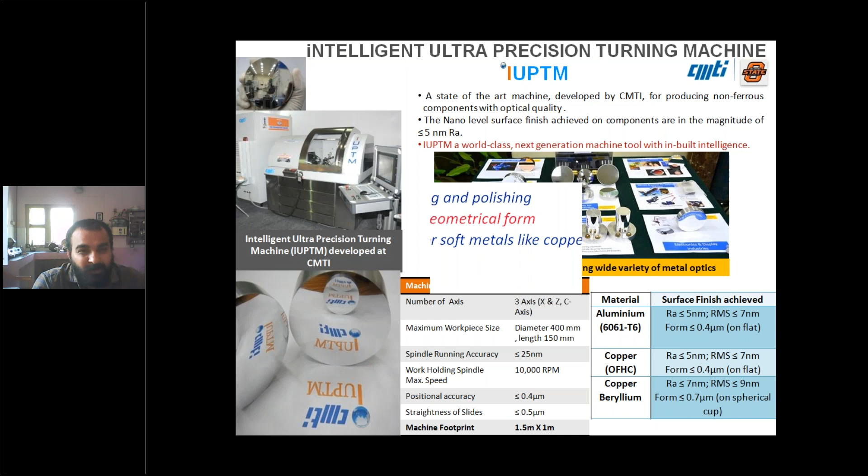Let us go to the applications. Coming to the applications, the reason this machine is very expensive is because the elements we use are all frictionless motion systems. This frictionless motion system provides nanometric motion, and also will not have any thermal deformations. That way you get accuracy in terms of nanometers.

This machine basically can produce metal mirrors, and also mirrors related to brittle as well as ceramic materials. If you look at an infrared camera, the basic heart of the infrared camera is the lens. That lens is made out of silicon and germanium, used for night vision applications.

If you look at our requirement, mobile is a very important device today. How has it become so important? Without mobile we don't move out from the house. Likewise, for a soldier, a night vision camera is very important; otherwise he will become blind and cannot fulfill the purpose he is supposed to. That way we have a huge requirement for night vision cameras.

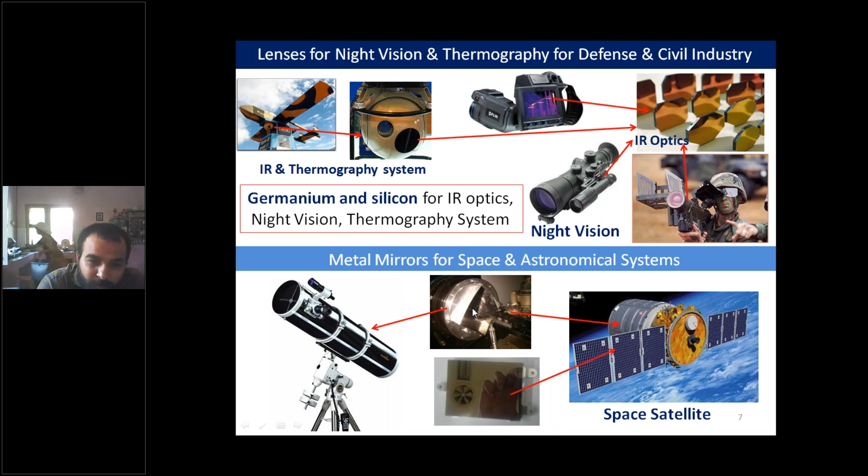Coming to the second application, metal mirrors for astronomical systems - those metal mirrors you can produce using this machine. And then we have ophthalmic applications, almost 70% of the lenses.

India produces about 60 to 70% of the contact lenses across the world. Those molds you can produce in this machine, and in turn you can make contact lenses for just 30 to 40 rupees. Those who had gone for cataract surgery - your parents or other old age people - would have spent 15,000 rupees for the lens, but actually it can be produced within 25 to 40 rupees using this technology. You can also produce ultra precise mechanical components. If you want to develop something like hydrostatic bearings or aerostatic air bearing elements, you can produce them using this machine, as it can produce nanometric accuracies.

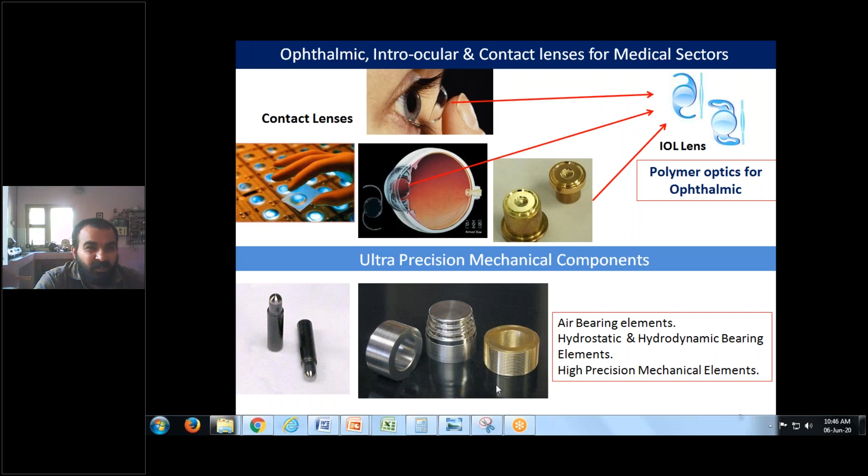If you look at defense and electro-optics applications, you can make head-up displays using this machine. When you go to high-end cars, you can see light reflectors - you can also make molds for those and mass produce them. For photonic applications, you can produce micro lens arrays. And when it comes to display systems, again you can make molds and mass produce.

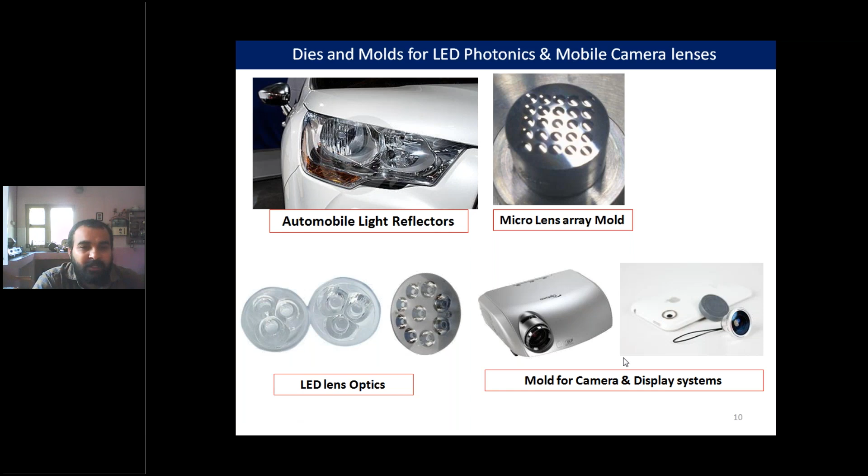Coming to energy applications, you can make Fresnel and diffractive lenses on silicon, which in turn increases the efficiency of solar energy. And coming to metal mirrors, lasers are used in various applications today. To guide the lasers, you need metal mirrors. All these metal mirrors are used for laser micro machining or laser welding and so many sophisticated systems, guiding the lasers.

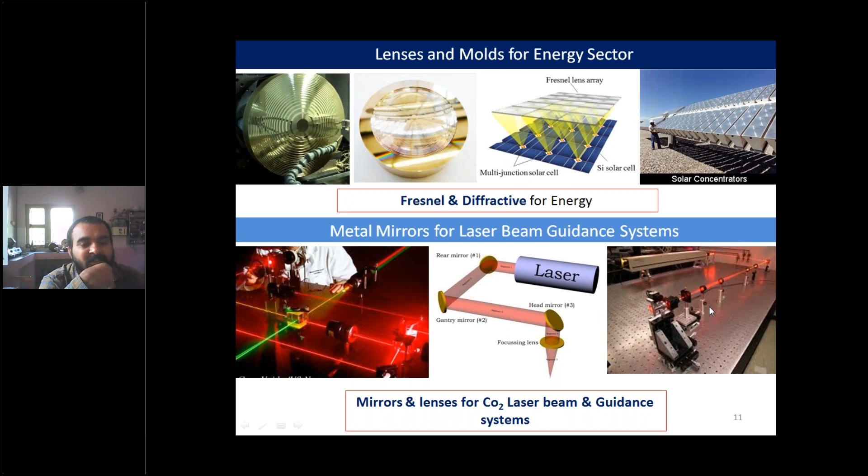Moving forward, that is about applications of ultra precision machine. One module I wanted to talk about, where you need to understand where artificial intelligence will be used in machine tools, and also how computer science and electronics students will be part of developing a single module.

This is a simple software module I have developed, a thermal error compensation for ultra precision machine tools. If you look at any component coming out from the machine, there are two aspects to look at: one is component accuracy, the quality of the component. When you keep producing that component, you will never get repeatability within 5 microns.

Most of the time, in any production environment, they say that whatever values are mentioned on the job will be somewhere close to 5 micron repeatability. This shows there is an error of 5 micrometers on the component you get. But the challenge here is we wanted to control the repeatability within 1 micrometer for a whole day's production.

This component takes 5 minutes to produce. Likewise, in 1 hour, 12 components; in 24 hours we may make close to 300 components. When I make 300 components, the component size should not vary beyond 1 micrometer. That is the challenge. Now how to address it?

The reason we get that 5 micrometer error in any machine is thermal error. There are many errors that occur on the machine—one could be geometrical error, one could be thermal error—but thermal error is the major contributor to component accuracy. About 70% of the component error you get is due to thermal effects.

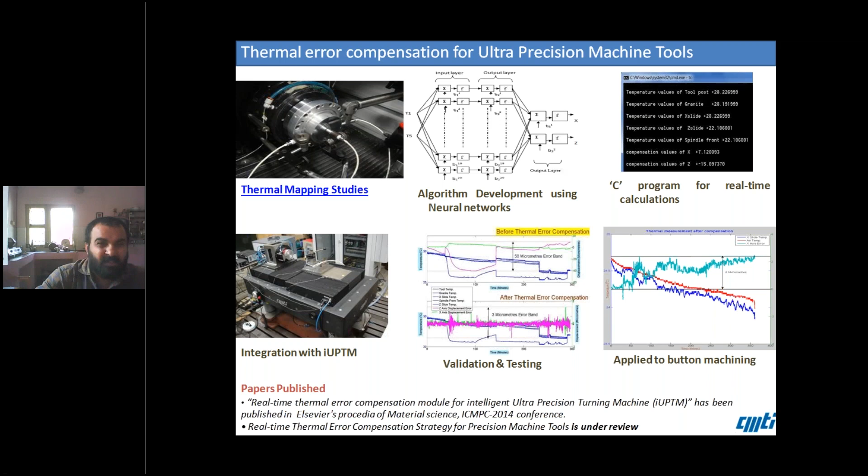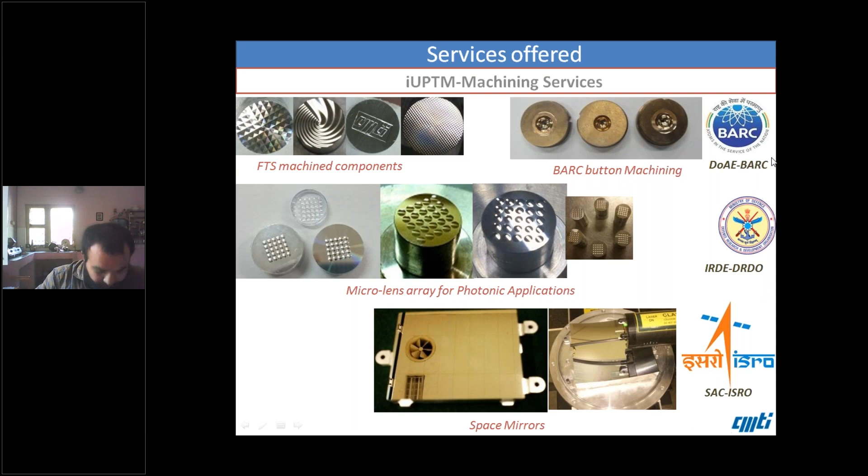And these are the services we do to the industries. Here we have supplied metal mirrors to SAC Ahmedabad. We have supplied some micro lens arrays to DRDO labs. Then we have made some precise components to Department of Atomic Energy. And these are some of the publications what I have done.

Whatever products we develop, we don't keep it in the laboratory. We try to take it to exhibitions and receive either comments or appreciation. We try to exhibit in international exhibitions. Very few organizations will be doing this kind of activity, because showing your product across the world is a challenge for Indian community at least.

This is a high-end microscope where you can do nanoscale imaging that we have developed. And then we developed the aerostatic spindle. This is again first time in the country.

None of the Indian companies could able to develop this kind of precise spindle where the running accuracies will be less than 50 nanometer. If you see a normal turning machine or turning spindle, it will have an error of 5000 nanometer, whereas here you get only 50 nanometer error.

When I make a circle, that is a perfect circle what a human can draw. If I put a pen and make it rotate, I will get a perfect circle. And here this is a hydrostatic slide where it can move in terms of 1 nanometer, and it can take a load of 1000 kg.

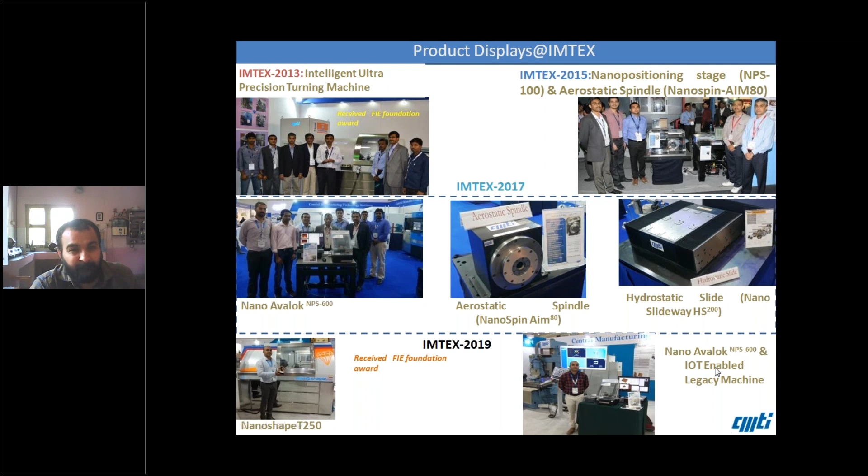With this, my introduction is over about the work what I have done. In summary, what I want to say is, if you want to develop a very good product, you need to have a multidisciplinary team. And in your college also, if you want to make a new product, let people collaborate between departments, and you can make a beautiful product.

And of course, if you see Industry 4.0, it is a combination of mechanical, electronics, communication, and IT. Then you need to have a dashboard developer where computer science students can do that. That way you can make beautiful solutions in the college itself.

And one more beauty about Industry 4.0, it is an easy catching technology. You don't need to have sophisticated equipment, because the internet web is freely available now, sensors are freely available at a cheaper cost, and the electronics whatever you buy from a local market, it will be very few bucks you can get it. You can do very simple solutions like energy monitoring for the college, your department, or your home. You can do many things.

With this my first topic is over. If you have any questions, I would be happy to answer.

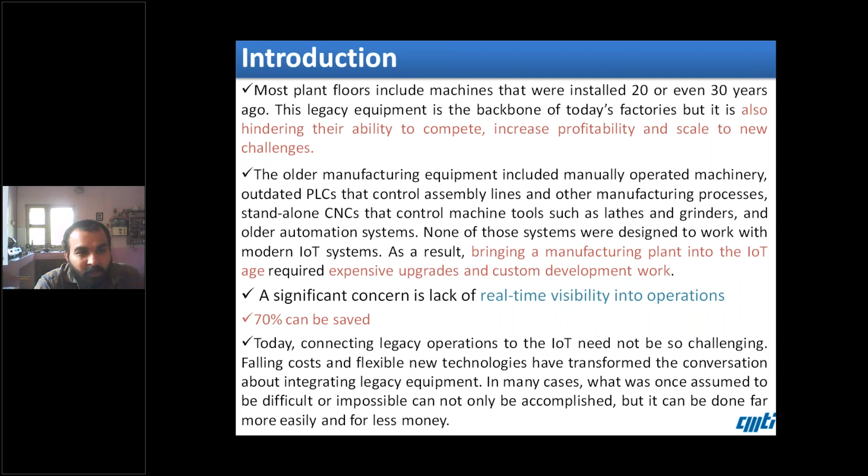That way industries would be very much happy to collaborate with academic institutes or research organizations if we can provide solutions. Now let us see how to convert these old machines into new ones. This is not very tough to do. There are only 4 ways wherein you can convert old machines into IoT smart.

Either you fix external sensors - you buy low cost IoT sensors or normal sensors, and then put it on the machine, and somehow you gather the data.

The second one is, there are some requirements where they wanted huge information from the machine. Then there will be limitation with respect to the old machines. In that case, what you have to do is change only the drive or motor or controller altogether. That way you can get full information about the machine.

If your requirement is that you have hardware and still you want to collect the information using the same hardware, there are some intelligent gateways available. Using these intelligent gateways, you can convert the protocols whatever way you want. There are protocol converters available - those we call intelligent gateways.

And we have video cameras. If your requirement is basically to monitor the production, or you want to measure something, then you can use video cameras and monitor it. This way you can convert old machines into IoT smart.

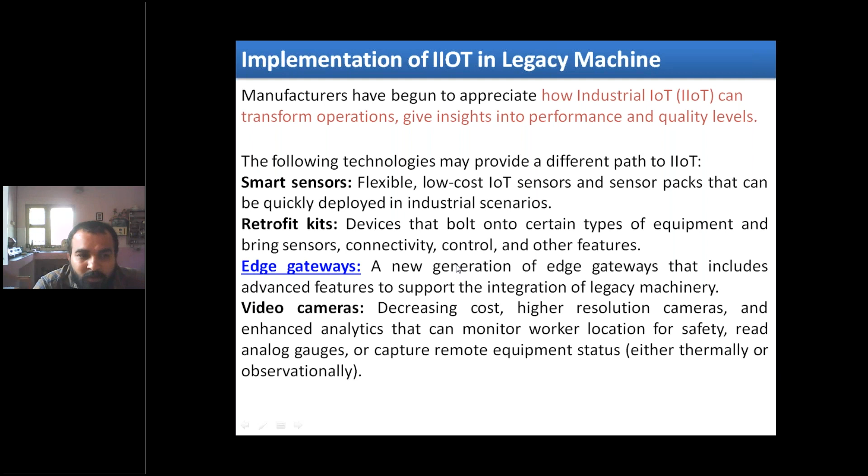One is using external sensors, one is changing hardware - only the electronics part, not the mechanical, because mechanical elements can work for longer duration, something like 30 to 50 years. In some cases you don't want to invest anything, then you just buy some intelligent gateways and push the data to the computer. In other cases, you just want to monitor the production or measure something, then you use video cameras. Most of the applications, these 4 solutions will work, and you can provide the solution to them.

And how can we do this? This is one demonstration I made to show people how to convert. I have taken a very old machine, and there I have mounted temperature sensors, and we connected LEM current sensors, and we connected an accelerometer, and we connected a pressure sensor, and we connected a video camera. The basic objective was to show all the possible solutions in a single module.

Then this you can use for thermal behavior, this you can use for energy monitoring, this you can use for health monitoring of the machine, and pressure you can use for any alarms, like pressure monitoring. And computer vision we have integrated for measuring the component accuracies - whatever part comes out from the machine, whether that part is okay or not, that report is also generated using this computer vision.

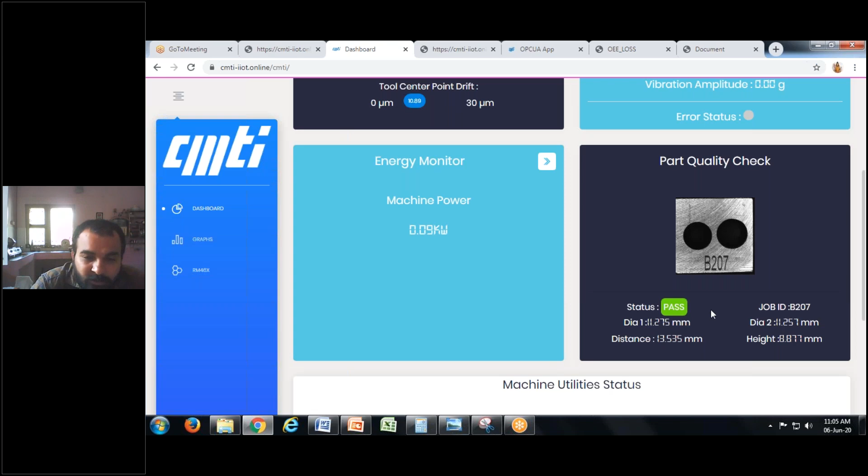As I showed the vision camera, this component will keep moving on the conveyor. It is an automated solution where it measures the diameter of 2 holes and measures the pitch. If within tolerance, we say it passes, otherwise it fails, and it generates a report at the end. This is a small demonstration of how to convert a legacy machine into IoT smart.

Then my second topic is also over. I'll be moving to the third topic, that is the smart manufacturing demonstration and development cell.

This is a government of India initiative. As I mentioned, in India only 2 to 5% of machines are connected. There is a huge scope for everyone to make that 98% of machines connected. That way, each industry will benefit with respect to Industry 4.0, productivity, maintenance, speed to market, and finally flexibility to adapt to new technology and increase the variety of jobs and products they can do.

The government of India has identified 4 centers for Industry 4.0: the first is IISc Bangalore, second is IIT Delhi, third is CMTI Bangalore, and fourth is Kirloskar Pune. Our basic job is to provide awareness to industries on Industry 4.0, and also demonstrate workable demonstrations.

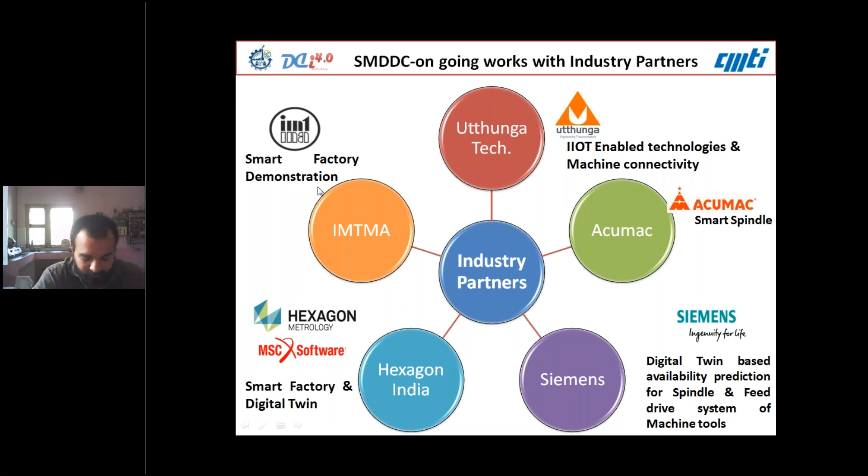Here the truck is bringing the raw material and coming to the loading and unloading station, and using this automated guided vehicle, it goes to the first machine using a robot to the turn mill center, then to the second machine using a robot to the vertical mill center. Then it goes to the grinding machine, then Schaublin, then comes to another machine.

Then it will go to the washing station, like a deburring station, and go for measurement. Once the measurement is done and the component is accepted, it goes back to the unloading station, and the item will be shipped to the supplier.

This is the whole concept I was mentioning. This is the smart factory we are trying to establish at CMTI. You can see here what is very important is data.

Whatever each machine is doing, you can see there is a Wi-Fi symbol. The machine keeps pushing the data, and that data goes to the master controller, one for giving information to the machine, writing programs to the machine, and also understanding what the machine is doing - live performance you can see. We also take real-time information from the machine and give instructions to the maintenance engineers.

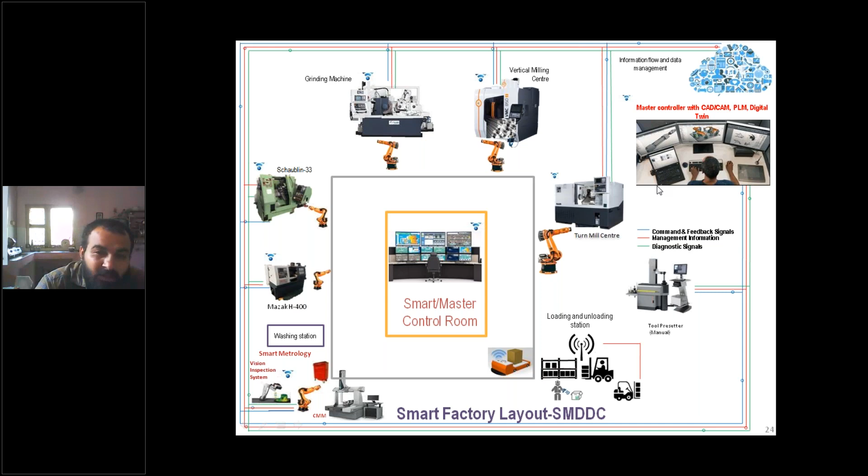to prepare or plan for the maintenance. All that activity, this master controller will be doing.

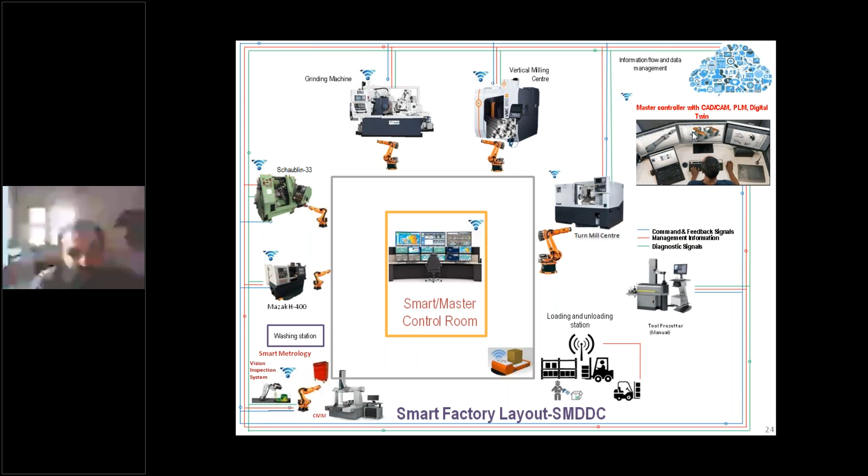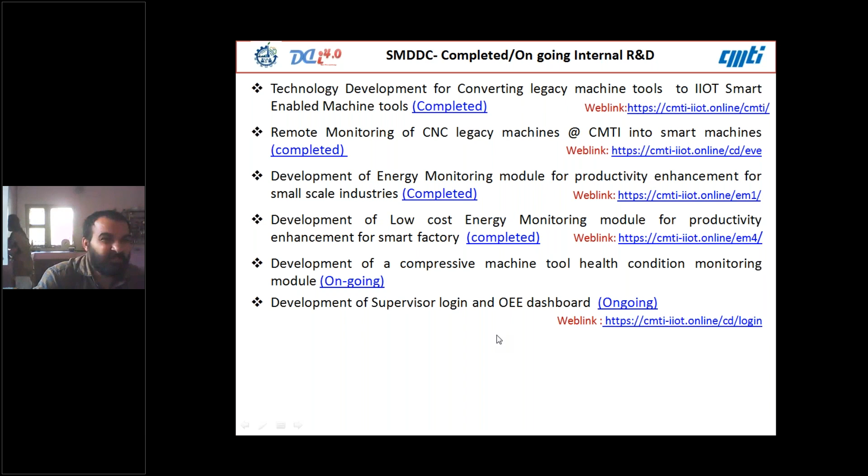When we started, we were also very new to Industry 4.0, and my simple idea was how to take one sensor's data to the cloud, and from there represent the data beautifully through an app, something like that. I had a plan, and finally we made one solution called energy monitoring. In this energy monitoring, we just mounted one current sensor, and using these energy calculations, the energy is measured and shown here.

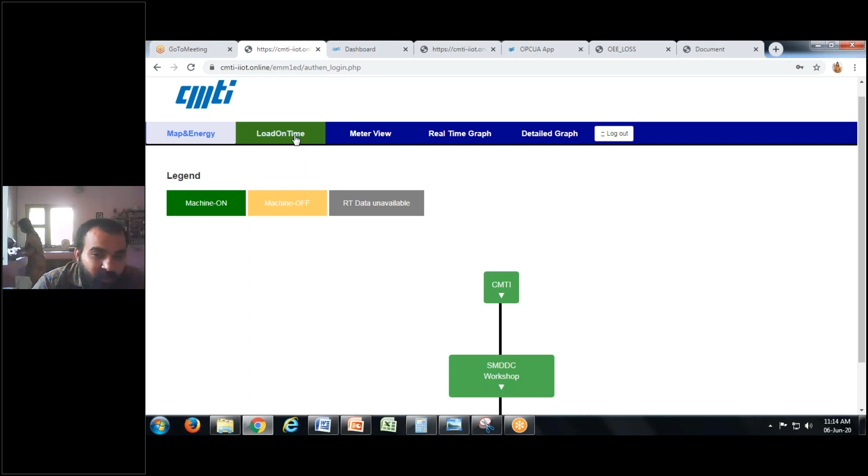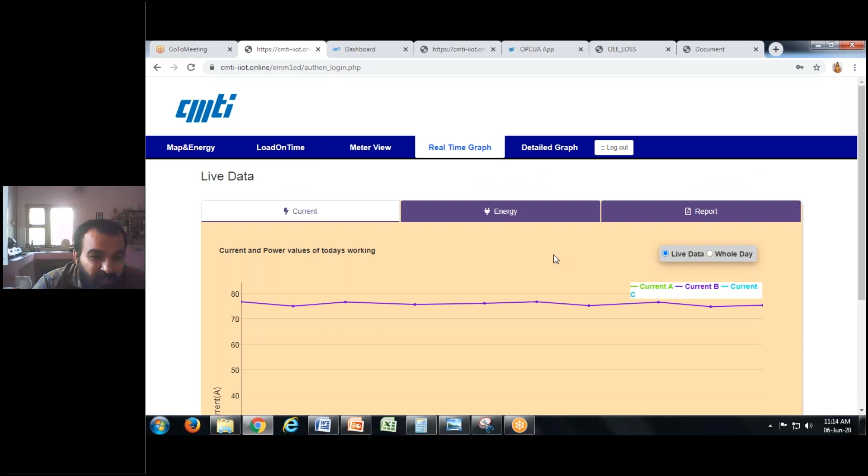Finally, this is the layout it shows. When the machine is on, it shows the machine status. This is the meter view - it shows the current, the power, and the real-time energy. Once the measurement is done, it monitors the complete whole day, generating readings every second.

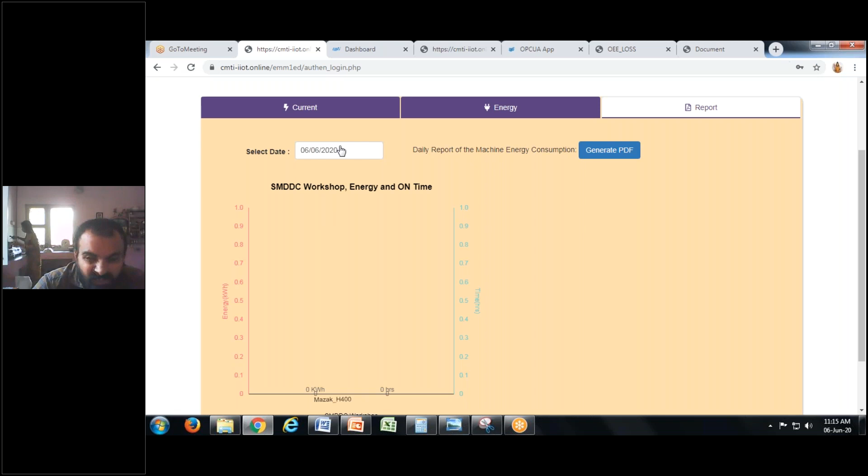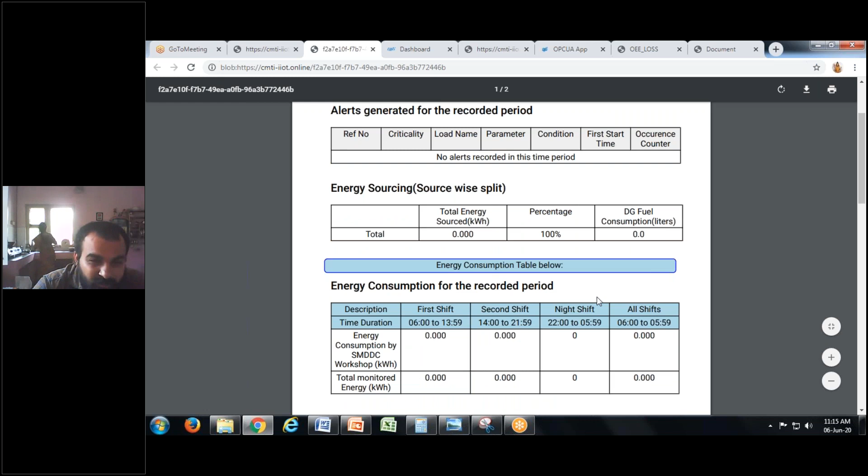It will generate the report every day. Let us open yesterday's date. This is today - the machine is off, that's why the energy is 0. It generates the report and sends it through mail. The module here is basically an energy monitoring module using a single current sensor, and finally the report is generated to the supervisor so he can monitor the productivity of his factory.

We have developed 7 solutions like this. One is for the person who has only a single machine, and the person who has 4 machines we call a smart factory. The second module I already demonstrated to you - this is the conversion of a legacy machine to an IoT smart machine.

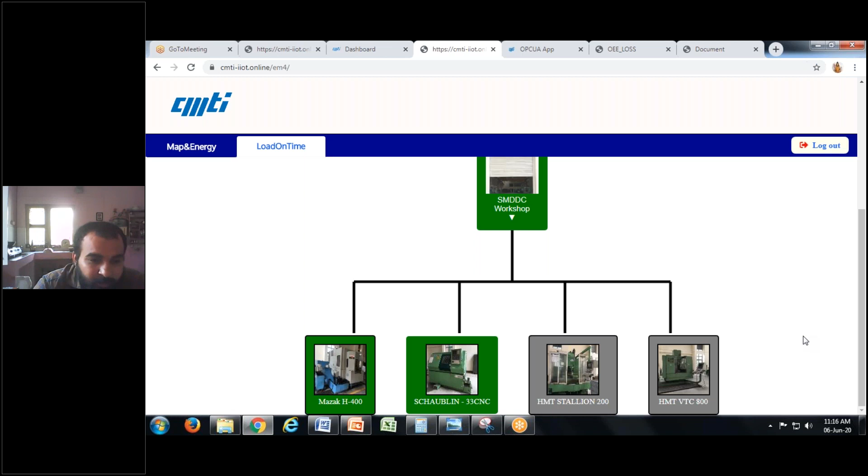The third module is again for 4 machines - this is again energy monitoring, one for the machine status, and the second for machine productivity monitoring. Finally, it also gives the report - individual machine report, how much it has consumed, how much it could run for today.

This is another application for remote monitoring of machines. This is an important module where, whichever machines you bought after 2000, you can get real-time data from them. This is called remote monitoring.

Here you need to do nothing. You just connect one LAN cable and you will get all the machine information to the dashboard. That way you can get the machine information, you can get maintenance also, you can get live information of machines, what it is doing.

The other module we developed is overall equipment efficiency. As I mentioned, every company wants to make huge money, but they don't know where they are wasting time and where their machines are losing time. For that, we have developed a module called overall equipment efficiency.

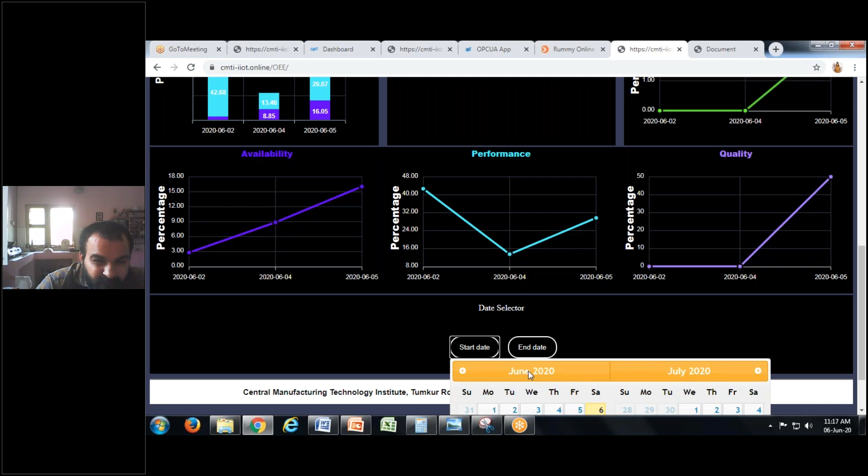In this you can just take yesterday's data. You can see that yesterday the machine was available for 16%, and in this 16% it could perform only 30%, and finally the product quality whatever it generated was only 50%.

Finally the efficiency of that yesterday's work was only 2%. Instead of reaching 100%, he is only utilizing the machine, the factory, for only 2%. That shows that he has to improve a lot.

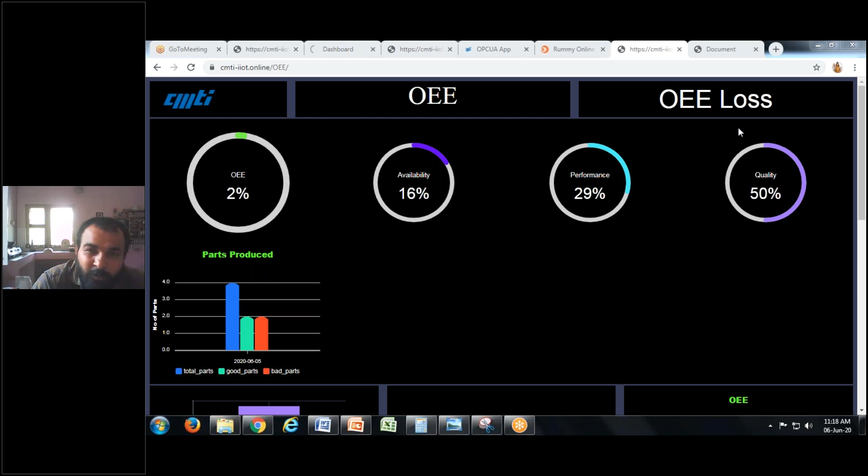Coming to why he could not do it, you can see the overall equipment efficiency loss, wherein he studied, and you can see he actually wasted a lot of time in the setup time itself.

He did not do any job. He wasted huge time in the break itself. He started production somewhere in the afternoon, at 11:30, and at 12:40 he stopped it.

This is another IoT solution. All these solutions were done by BTech students.

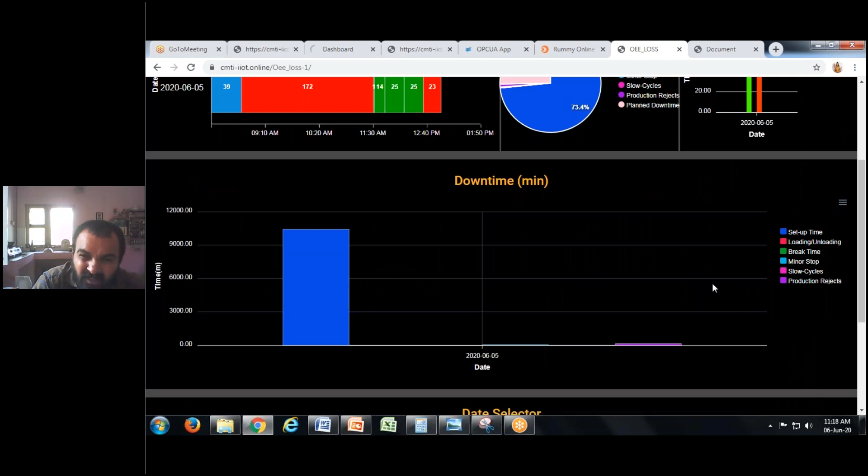Then during this COVID, we developed a small ventilator. I will play that video.

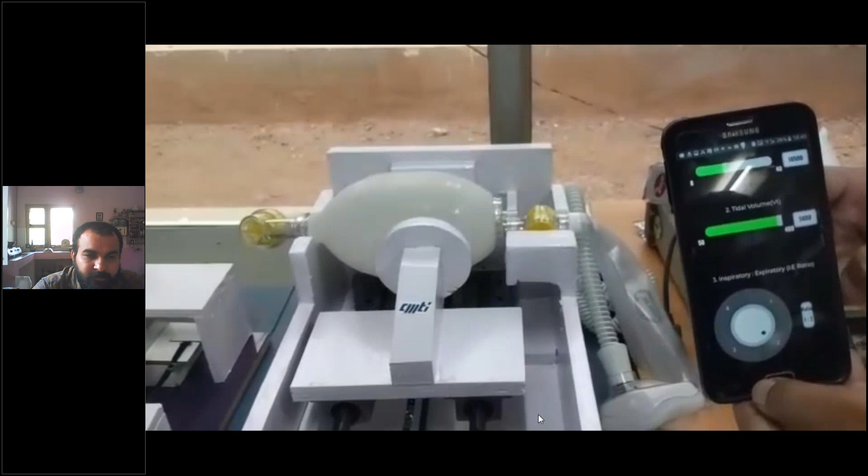There is another small application we developed, that is the mobile operated low cost ventilator. During this lockdown time, we thought getting display systems would be very tough. For that reason, we developed a small module so that everybody with a mobile can operate this low cost ventilator. Again, it is the prototype development we did using the ambu bag concept.

I think you would have seen a lot of videos like that on YouTube. Likewise, we also made this solution. It would cost around 3 to 4,000 rupees. Very low cost ventilator.

And these are some of the solutions. All the solutions were done by final year students or passed out students. It doesn't require any kind of expertise, because nowadays information is available on the internet. Only thing is you need to put determined effort to make this kind of solution very fast.

This low cost ventilator solution, we made it in a single day, almost 24 hours if you put it together. Within 24 hours, this entire solution was made with the help of hardware node MCU. With respect to electronics and software, what we spent was just 325 rupees.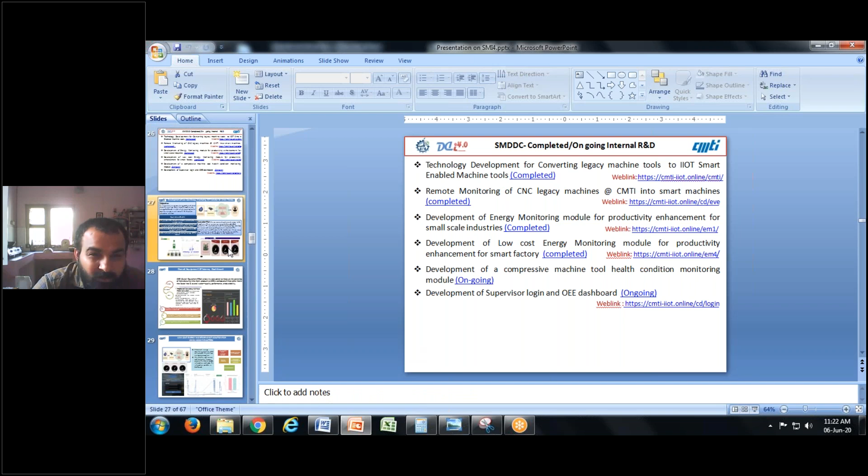I no need to give explanation about what each module consists of. Anyway, you have seen the demonstrations, the IoT solutions we have developed, and these are all explanations for that.

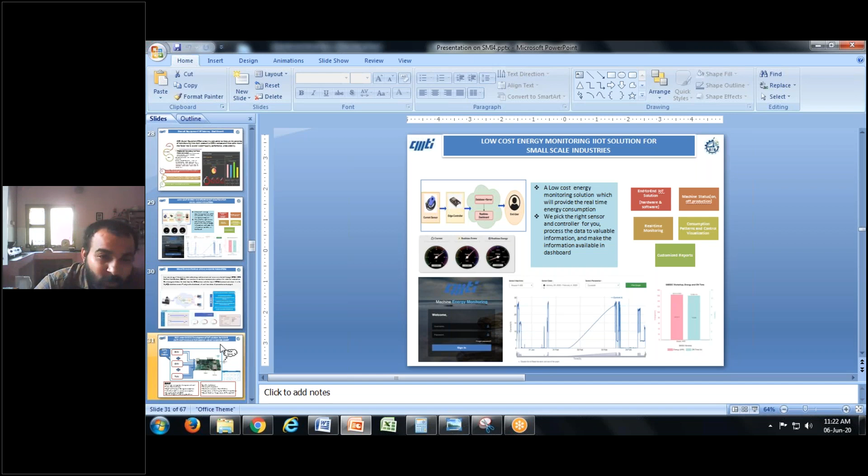In some cases we also work on the hardware, because sometimes whatever you get online, like Arduino or Node MCU, may not be feasible to develop a solution. Then we try to develop the entire hardware ourselves. We design the hardware, buy the elements, and give it to the PCB manufacturer.

There are so many PCB manufacturers in our country. We give it to them, give the layout and the elements, and those people assemble everything and give it to us.

And this is one prototype. This is the sophisticated hardware we are looking to develop, and we are waiting for it. Before that, we tested whether it is really working or not, and once it started working, we developed this design and gave it to the person.

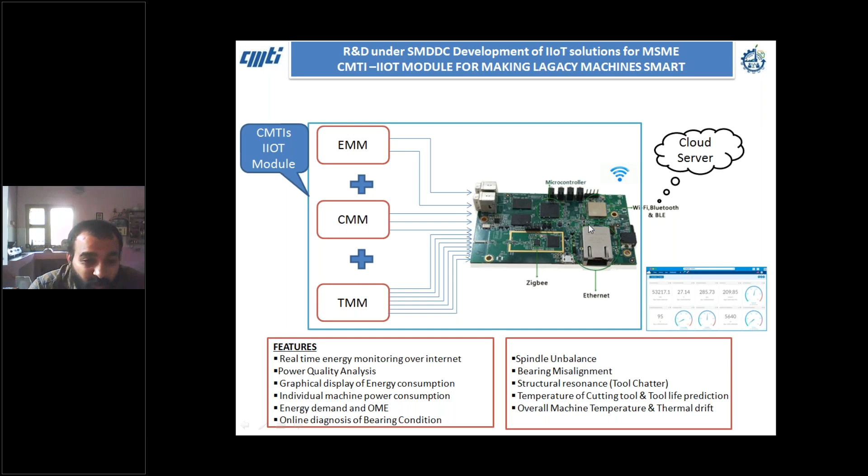You may ask, sir, how are you getting all this, how can we develop these solutions as we are new like you. What we do, as I said initially, is buy solutions from a third party or whoever the solution providers are. We take like 3 months or 6 months or 1 year. We learn the functionality of this module, and later once we acquire the knowledge, we develop it.

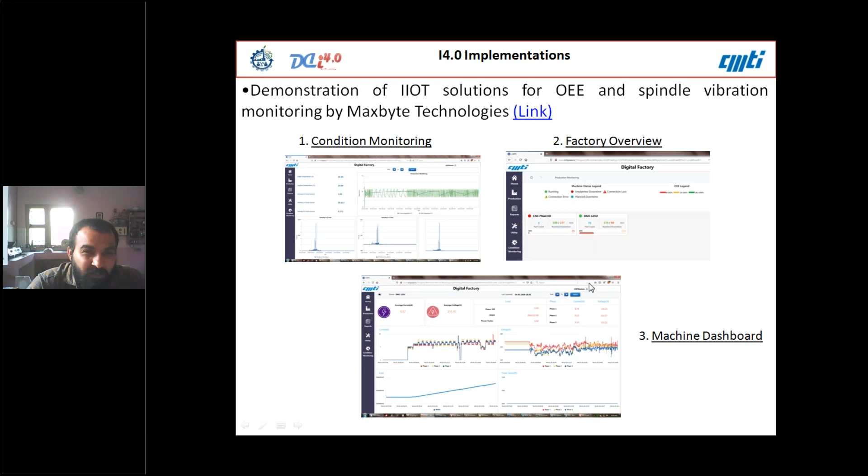This is another, a Robert Bosch solution. We took it for almost 3 lakhs, but we could develop it ourselves within 4 to 5,000 rupees. You don't need to have a sophisticated solution.

You can buy an energy monitor - one energy meter available for 4,000 rupees. Using serial communication, you can get all the parameters and publish it in whichever web space you want, and make dashboards. With that, we can make a complete energy monitoring solution within 10,000 rupees.

Once you get the data to the cloud, data analytics is a different challenge altogether that you can do later. That depends on the user requirement. You can work on the data.

We also connected one metrology equipment, the coordinate measuring machine. This machine, whatever it measures, sends the data using PiWeb software, and we get automatic report generation, something like this. Whichever data are within tolerance, we measure it. Whichever data is beyond tolerance, it will go for re-machining.

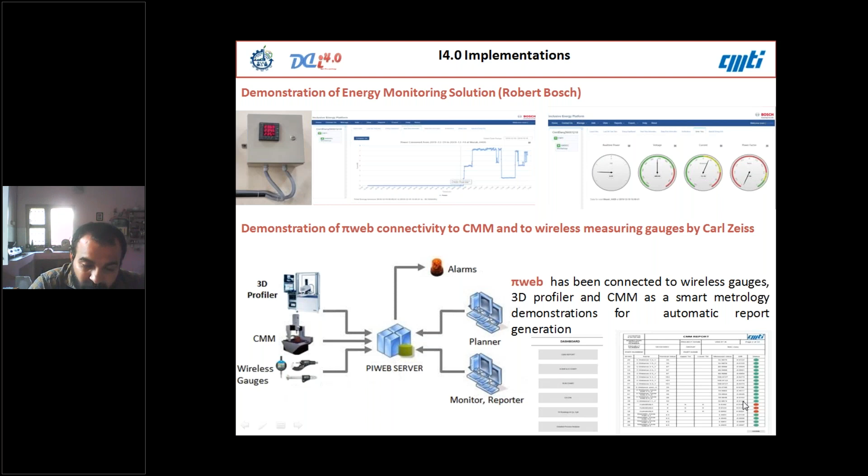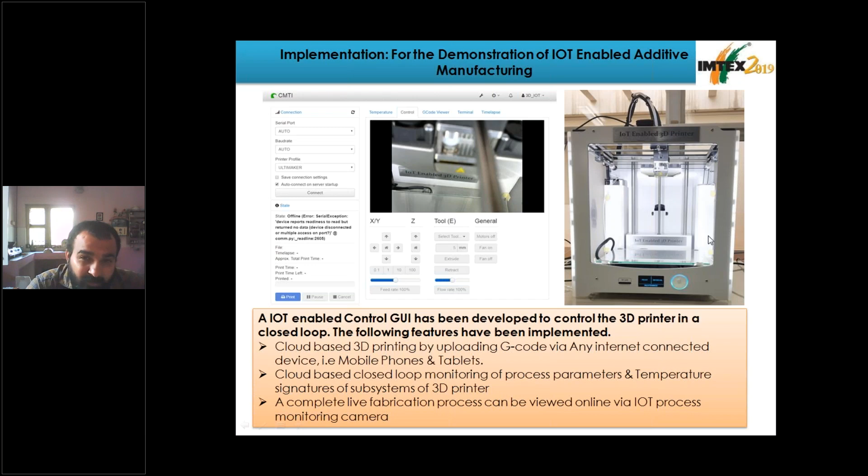This is already explained to you - this is the old machine what I told you about. We converted this old machine into IoT enabled smart machine. And this is another 3D printer where you can give a model through mobile, and finally the model will be printed here. This is the IoT enabled 3D printer we developed, and we also exhibited it in Imtex 2019.

With this, my talk is over with respect to the smart manufacturing development cell. Till now, I have talked about all the applications related to the industries.

Let us understand what is smart manufacturing and Industry 4.0. I have wantedly chosen that first to bring curiosity to the students, that products can be developed if you have a multidisciplinary team. The second module I mentioned, because if you are looking to develop solutions, go nearby to manufacturing companies in your region and try to offer solutions for old machines, because those are very good - that's why I opted for the second one. The third one is what exactly we do under smart manufacturing - that also I have covered.

But now I'm coming to the basics of Industry 4.0. What is Industry 4.0? People are talking about Industry 4.0 nowadays like mad - wherever you go, any conference, any seminar, they ask are you working on Industry 4.0? What is this Industry 4.0?

Industry 1.0 is basically mechanical production that happened due to the steam engine. When it comes to Industry 2.0, this industrial revolution converted to mass production using electricity. When it comes to Industry 3.0, there are programmable logic controllers, where electronics started getting smaller and smaller despite the complexity, and any complex operations can be easily done in the third generation. That's why computers and programmable logic controllers evolved in Industry 3.0.

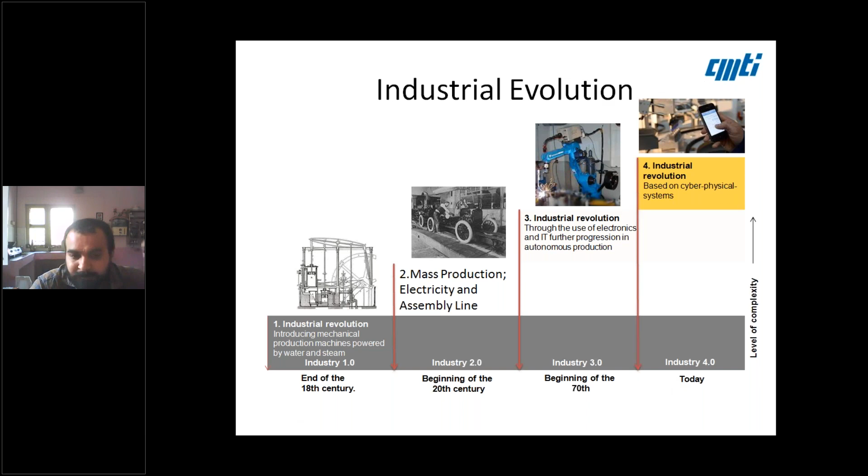Why do we need it? Because it can eliminate waste, and we can reduce the cost significantly, so the customer will get the product at a cheaper cost. And we can also make complex solutions.

Like today you talk about robots, collaborative robots, autonomous robots - it means the robots are able to take decisions and do activities along with human beings. That kind of complex job is offered by Industry 4.0.

And of course, if your industry is not Industry 4.0 ready, then your industry may not be able to compete with other industries.

Another important reason people go for Industry 4.0 - similarly, you can improve the productivity, called overall equipment effectiveness, and the part quality you produce on the machine will be further improved by adding some external sensors and transducers.

The production speed at which the component comes out will be much faster, because you are using robots for high speed applications, cobots for collaborative applications. You can also increase the flexibility and make any kind of complex jobs, because not only humans, the machines are giving a lot of inputs, coming out with artificial intelligent models, so you can make a variety of products.

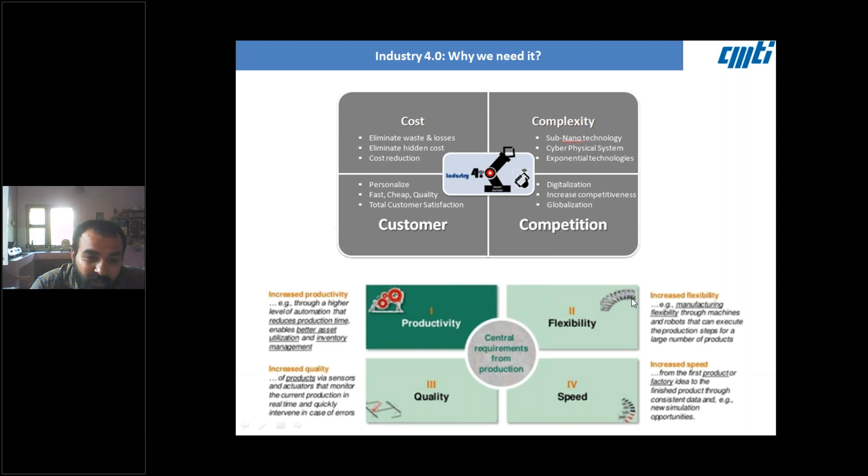Earlier, a car manufacturing company would have one or two models. But today, one model may not serve the purpose of that company. It needs to come out with at least 5 to 10 varieties of car models. Only then can it succeed in this market.

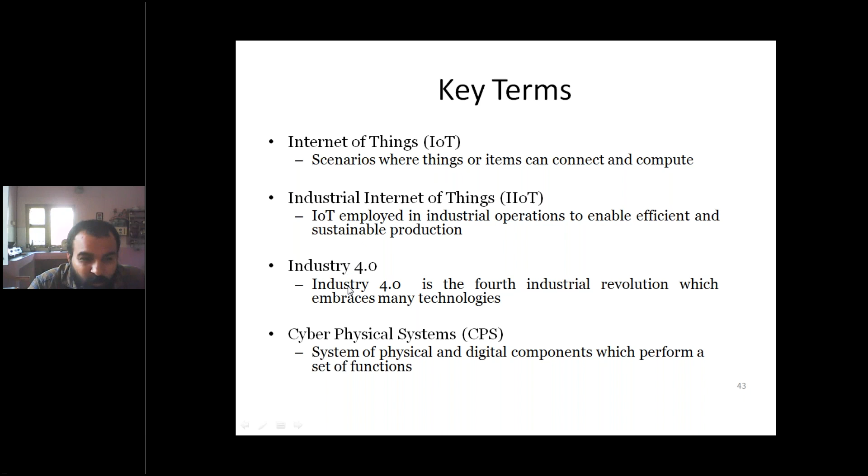These are some of the key terms: Internet of Things, Industrial Internet of Things, Industry 4.0, and Cyber Physical Systems. All put together, they are still part of Industry 4.0. Internet of Things is whatever you are doing on a mobile, and whatever data you get on the mobile, those are also Internet of Things. Industrial Internet of Things is when IoT devices are connected to the industry. And Industry 4.0 is a superset of IoT and cyber physical systems.

There are some elements of it. Whenever you are planning to get into Industry 4.0, you need to do vertical and horizontal integration. This is very important. Let's talk about what this means.

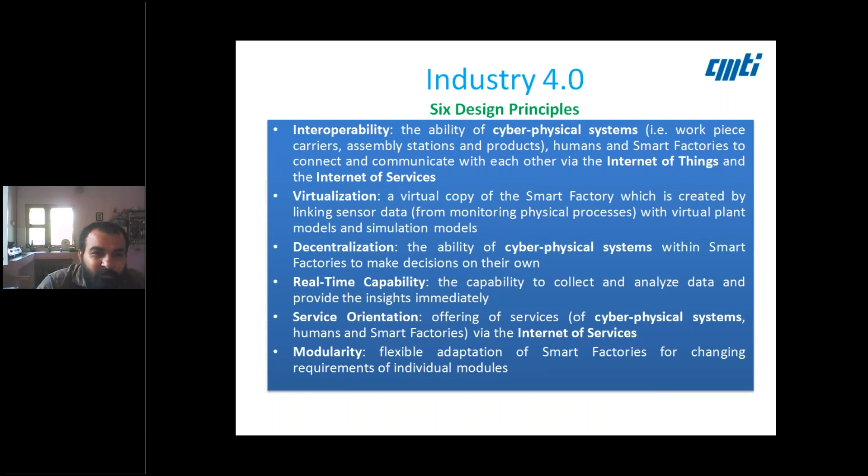What are the building blocks of Industry 4.0? The building blocks are autonomous robots, and as I mentioned, big data analytics is going to be a disruptive technology. Then augmented reality - people are using it for maintenance applications - and additive manufacturing is also going to be disruptive. At the moment, people see additive manufacturing only for plastics, but once metal additive manufacturing costs come down, this technology is going to revolutionize all CNC machining processes.

Then you have cyber security. When making solutions - as I mentioned, we've proposed a few solutions to the Indian Army - their concern is cyber security, because whichever modules you take to the cloud, cyber security is one of the major concerns. Anybody can take the data. As I mentioned, data is the key, you need to protect it. If you are attempting to develop any solution for defense, navy, army, or atomic energy, cyber security will be one of the greatest concerns. People can work on cyber security as well.

Then you have Industrial Internet of Things. Earlier, people used to make only the sensor, but the sensor alone you cannot sell in the market unless you make a sensor with wireless communication - only then would people look at that sensor for industrial application. That is IoT.

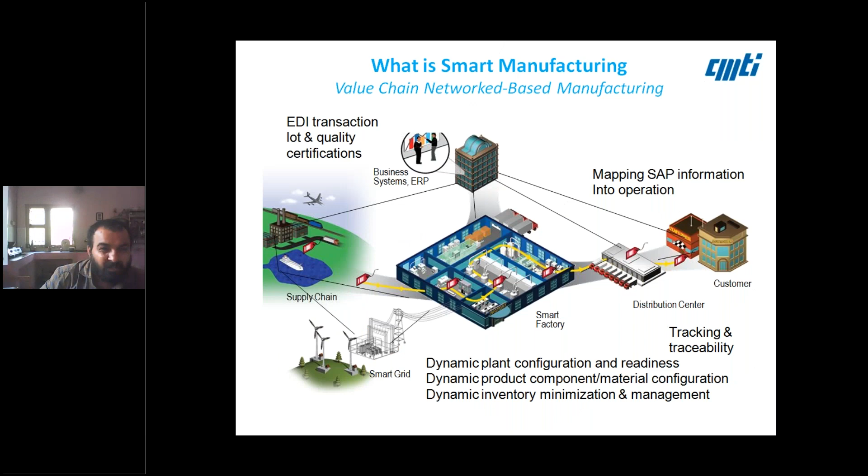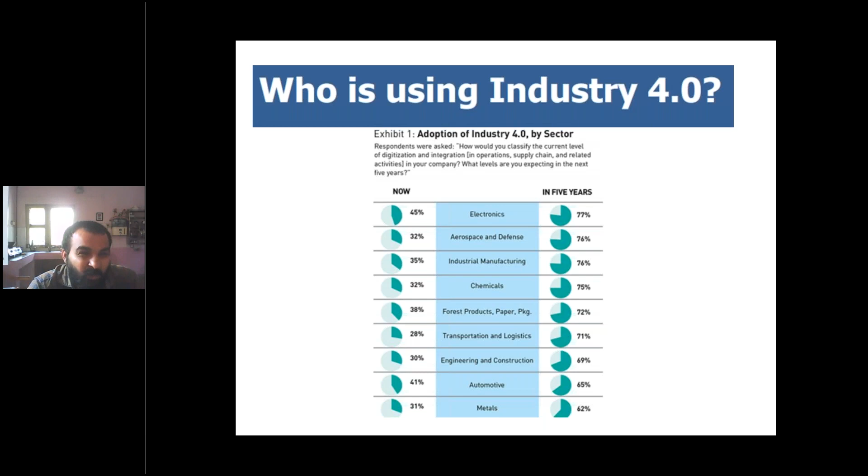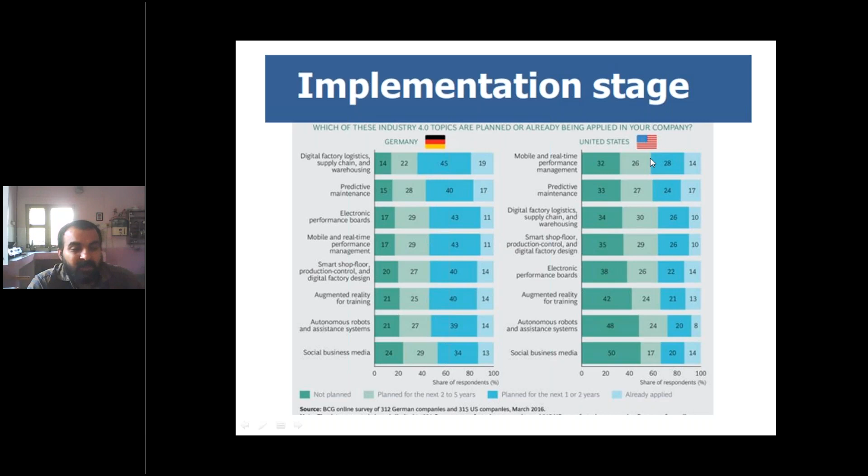And how do you catch up with industry 4.0? Suppose if you buy the latest hardware which provides all the information to you, still you may not get the complete benefit from industry 4.0, because industry 4.0 is something like an evolution.

You need to create a history of data, then only can you make nice models, then only can you do some kind of analytics. Some kind of history of data is required, then only can you take wise decisions. That's what I'm trying to say.

In the beginning of industry 4.0, what you should do is ensure that all the devices you are using in the factory, somehow you get the data, connect together all the sensors' data, and collect the big data and keep that information.

In the second stage, what you can do is try to add some intelligence, using artificial intelligence on that data, and come out with some models. Then once you have a model, you try to do some prediction of what is going to happen, because you found that something is going to happen, so you need to have predictive capability.

You need to build some kind of knowledge base, and finally decision making is very important, because everybody will have knowledge but decision making will lack, since that is another important thing. This is a very important aspect called autonomous action. The day machines take decisions on their own, we say our involvement is not required for that. That is called the industry 4.0 vision.

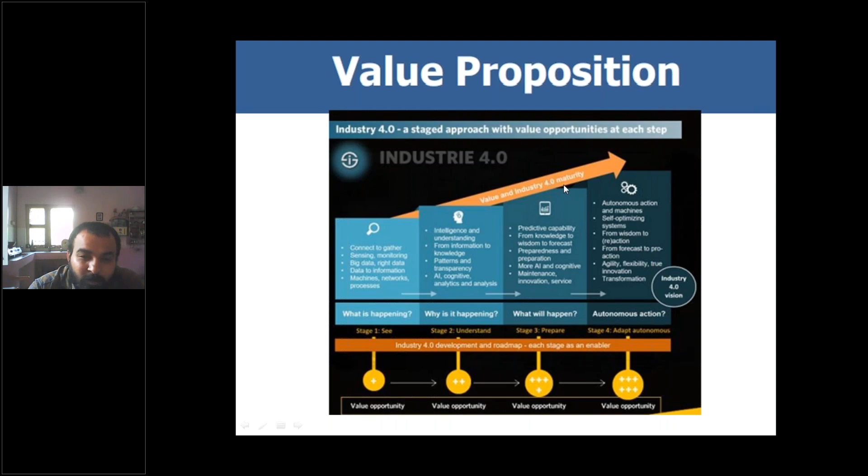And what are the disruptive technologies? What is a disruptive technology? It can change the whole scenario. Like, I'm working as a scientist, my growth may be limited with respect to the research community, but when you work on disruptive technologies, the growth of a person will drastically change. The applications that come out and the models that come out can revolutionize the company, it can change the fate of a person, a company, and an organization.

In terms of disruptive technologies, big data analytics is going to be the booming field. Then digital supply chain is second, followed by Internet of Things as the third. Then cloud computing, advanced robotics, machine learning, 3D printing, drones and self-guided vehicles, and the sharing economy.

These are the disruptive technologies. And if you look at the jobs in Industry 4.0, you can see what skills and fields they'll be looking for. One is data management, data security, software development, programming for automation like robots, then PLCs, then integrated systems, then data science like big data, then analytics.

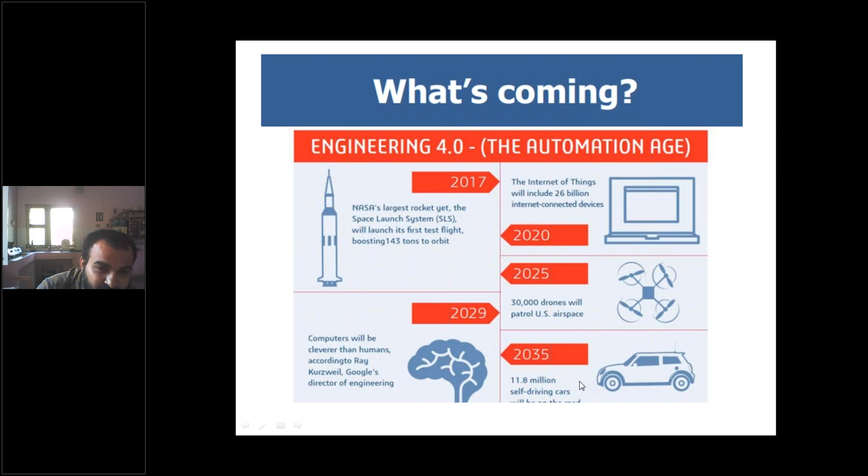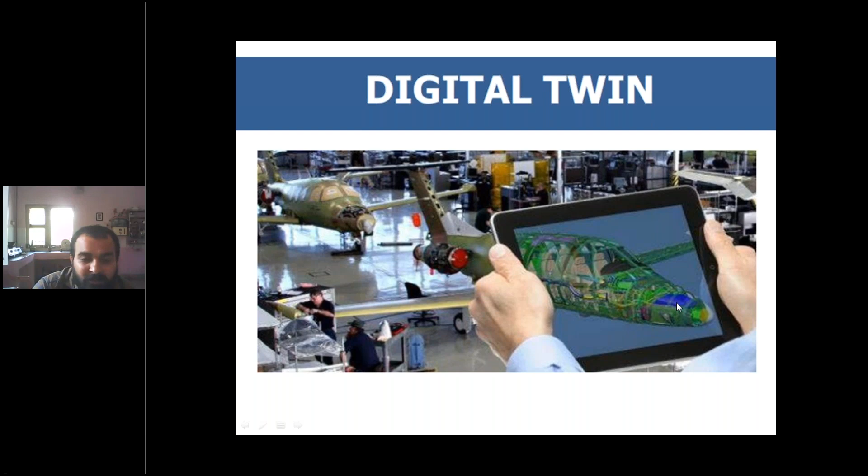And with this, I'm done with my presentation.

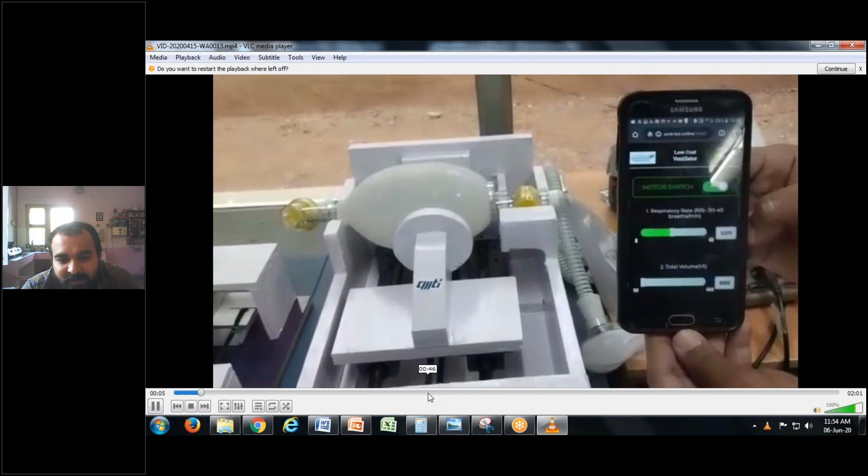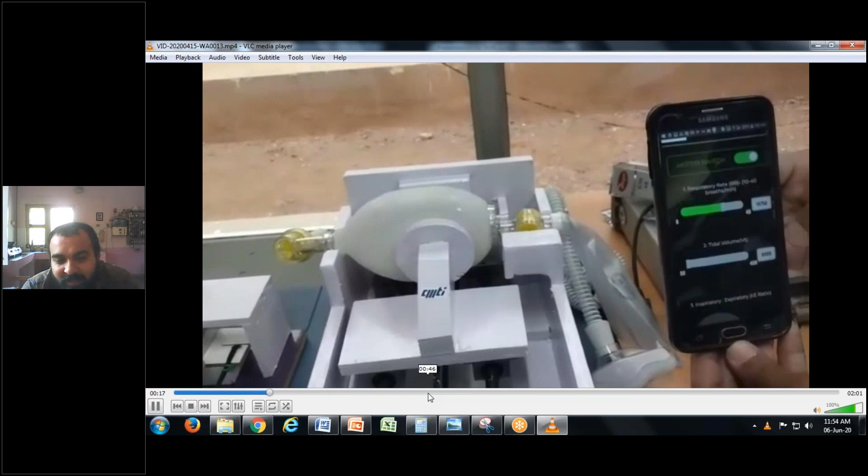How long can a person stay on ventilator? That is a very generic question. It depends on the person. Basically, ventilators are supposed to work 24/7 for 14 days. Whichever equipment, whichever ventilators are there in medical hospitals, all those hospitals' ventilators work for 14 days continuously with 24/7 operation.

Okay, our ventilator works for about 4 to 6 hours of continuous operation.

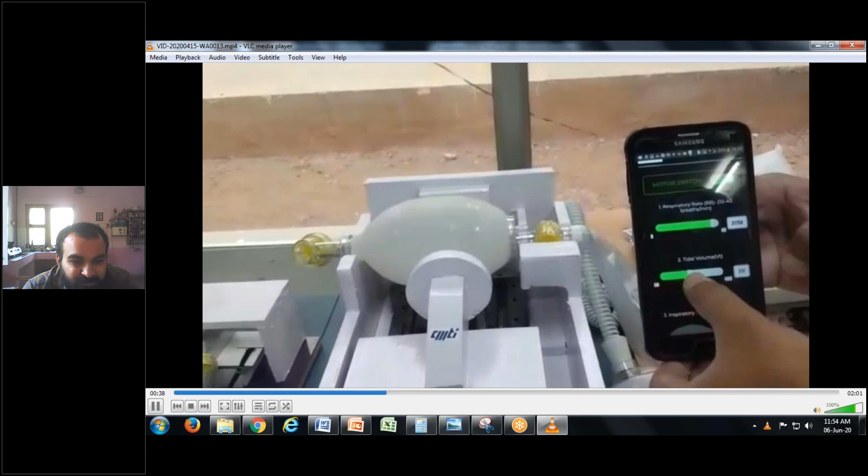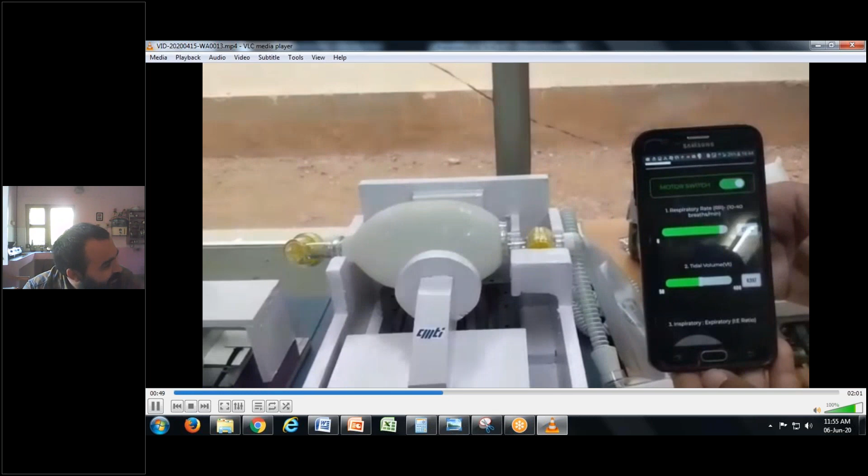Can you die while on a ventilator? I don't know whether this information is validated or not, but most popular leaders, even after death, are kept on a ventilator for 4 to 5 days, since sometimes there is a possibility they may come back to life. Once a person goes on a ventilator, only 2% chance exists of being alive; otherwise 98% chances are nil.

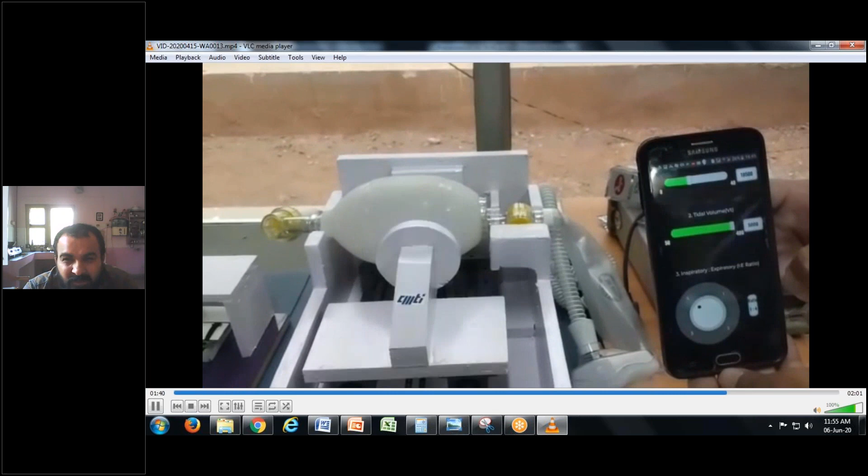A question from a student: how is this webinar useful for CSE students?

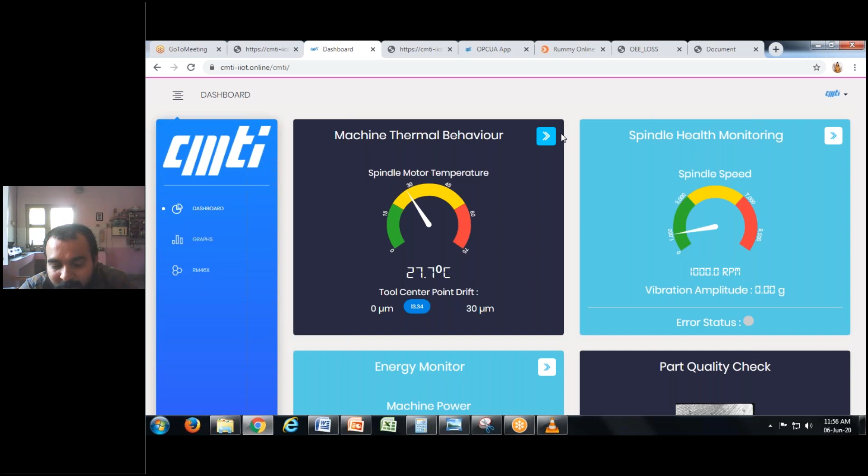As I told you, all these IoT solutions shown here were done by computer science students. If I asked a mechanical engineer to do this work, he couldn't, because he doesn't know HTML or Python programming. These solutions were made by computer science engineers — the entire dashboard design and backend programming was done by computer science students.

Hello sir, hello? Sir, when do we get the certificate? Sir, I mean Chandrasekhar — please ask. Pratap, you please answer.

You can get the certificate by filling the form we are giving you on WhatsApp as well as in the chat box in GoToMeeting.

Good noon sir, it was a very wonderful presentation — we learned a lot about Industry 4.0 and smart manufacturing. I'm a mechanical engineer, so my question is: how could Industry 4.0 or smart manufacturing have helped in fighting the pandemic, and how better could it have helped overcome the COVID-19 situation? As I mentioned, today you see why we are opening the lockdown.

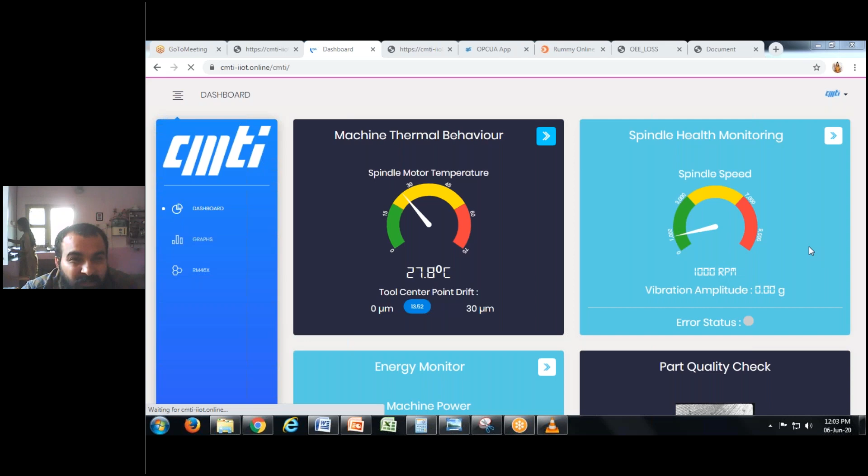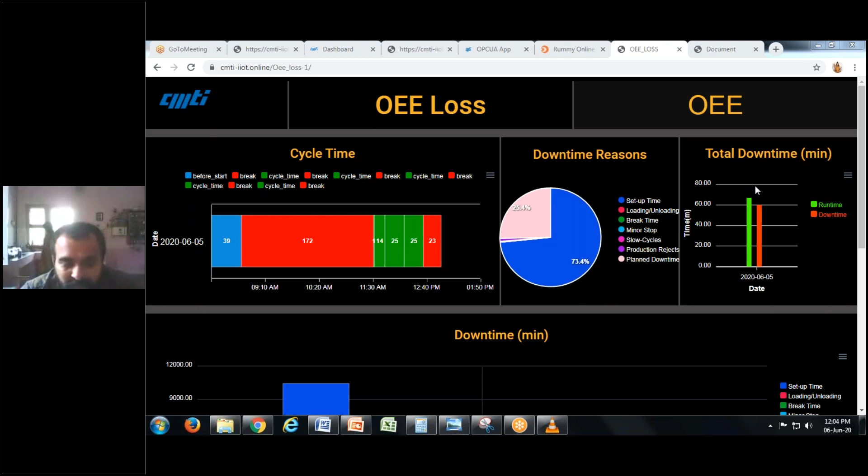This entire data, whatever I've shown here, will be saved in a cloud only. Wherever we want very quick data, in milliseconds or microseconds, we don't do analytics after the cloud, we try to do it before, at the edge itself. Wherever seconds are acceptable, we do analytics after the cloud, or in the cloud also we can do analytics.

So not for a particular company, but when we want to give information to other companies, we use some kind of key. That I'm not sure about. There are some open sources. You can give the same data to multiple people. That means a particular company's information will be given to any other company if they want. So is there any API key like that? That I don't know, Pratap. Okay sir, thank you sir.

Any other questions? General questions also, I'll be happy to answer, related to career.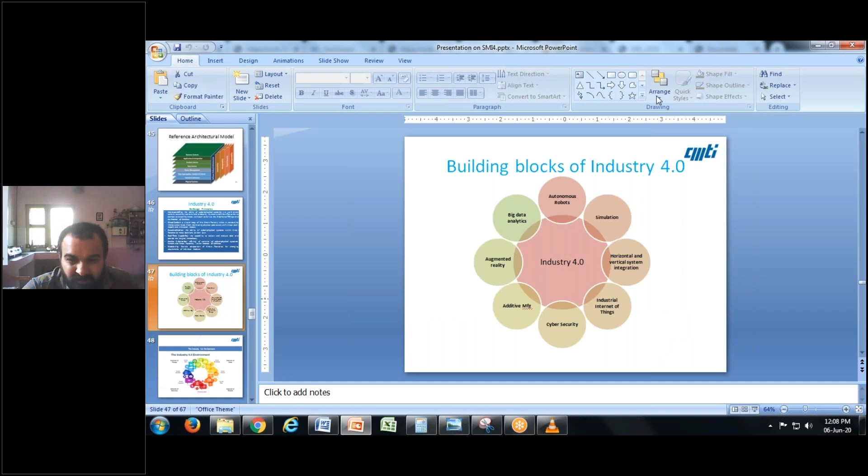Now you can see here. This is purely big data analytics, both the electronics person and computer science person can do it, because it requires only analytical knowledge. When it comes to augmented reality, here also computer science students and electronics students come into picture. When it comes to additive manufacturing, it requires some mechanical expertise if he's working on the process. If he's working on development of additive manufacturing, then computer science, electronics, and mechanical all come into picture. When it comes to cyber security, only computer science people will benefit from it.

When it comes to industrial internet of things, electronics and electrical will come into picture. When it comes to horizontal and vertical system integration, communication engineers will come into picture. When it comes to simulation, electronics, computer science, as well as mechanical, all three disciplines' knowledge will come into picture. And finally for autonomous robots, both computer science, electronics and mechanical people will come into picture.

One thing I want to tell you, over time only you can acquire the knowledge, but in the beginning, you can get into any field of your domain. Over time you can become a multidisciplinary engineer, because in college whatever we learn is just surface level knowledge. But when you go to the depth, that time only you will understand how to solve real challenges. That time you need at least 5 to 10 years of experience. That's why people always say you should have a long term goal rather than a short term goal.

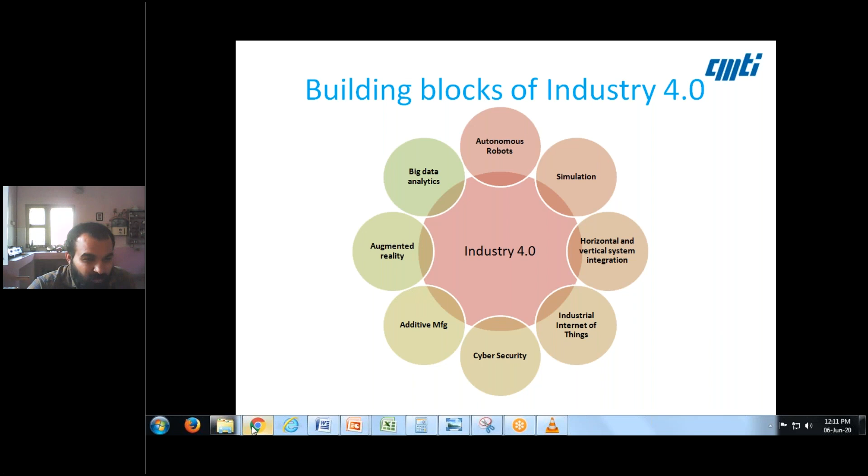Okay, I think this is one small module we have mentioned. This was done by an intern, a final year student. He used it for one module. I don't know exactly what module he has done, but he used MySQL, PHP, JavaScript, and then C# is required. And finally for report making, he used a PDF maker.

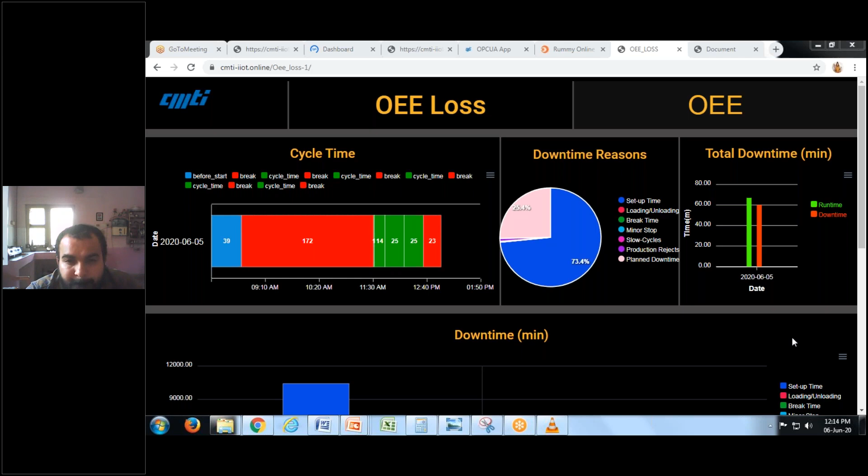Okay, if we don't have any questions, we can wind up, Pratap. Yes, sir. Pratap Chaitanya, sir, wait for a while, sir. Yeah. Please respond, Pratap Chaitanya. He responded, Raja. Hello, yeah sir, tell me Raja. Hello, Narendra, please wait, listening for one more minute. I think it is time, sir. Wait for a while, sir. Hello, sir.

Narendra, Pratap Chaitanya, please give the vote of thanks. Sir, yes, yes sir, yes sir. I sincerely thank our dearest speaker, Mr. T. Narendra Reddy, sir, for giving valuable lectures and spending your valuable time with us. On behalf of our EC department, we would like to give you the honor of appreciation with a certificate. Here is the certificate for you, sir. Thanks for your valuable lecture. Thank you, thank you.